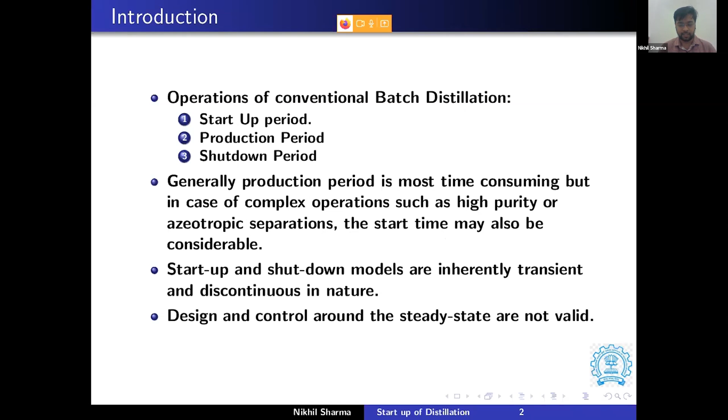The startup and shutdown models are inherently transient and discontinuous in nature. Therefore, the design and control around the steady state are not valid for these startup and shutdown operations. So moving on to the scope of startup operations, the dynamic simulation of startup and shutdown operations is beneficial in modeling, design, control, and operability of distillation columns.

Training of operators can be done. For designers, the information may help in avoiding operability and control problems. Modeling of startup operations is also of interest for optimizing a distillation system, wherein for optimization to initialize, certain assumptions are involved, that is pseudo-warm, steady state, initial total reflux, etc. That can be avoided in the presence of a proper startup model.

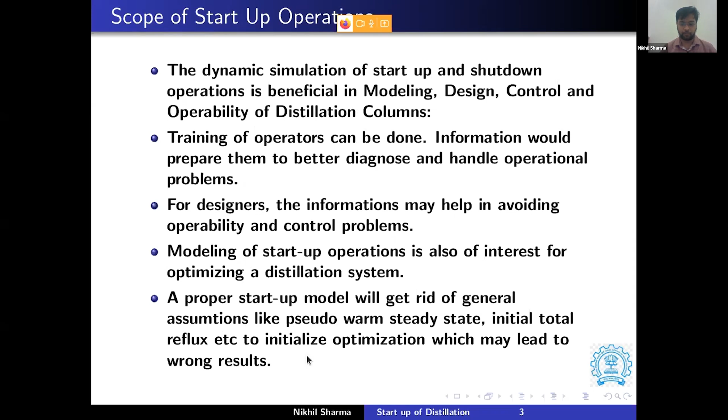So objective: despite being critical operations, there is limited literature available for startup and shutdown operations. This is mainly due to inherent complexity involved in modeling the dynamic behavior such as phase change, variable structure, and model switching during the simulation. Some publications are available which take into account many assumptions like ignoring transition or adding trivial equations, but most of the time these are not valid assumptions.

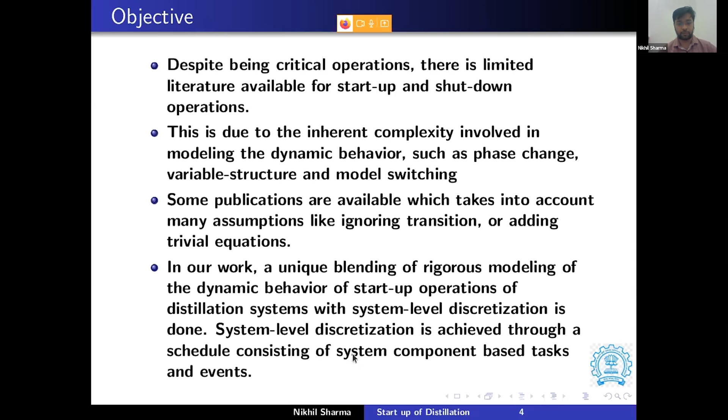So in our work, a unique blending of rigorous modeling of the dynamic behavior of startup operations of distillation systems with system level discretization is done. System level discretization is achieved through a schedule consisting of system component based tasks and events.

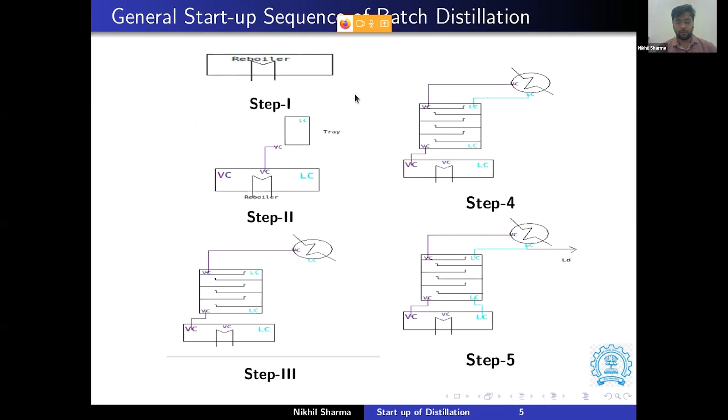So we can see, to model this behavior, we have the phenomena of changing the equations of the model in between the simulation. That is, VLE equations have to be incorporated, and addition or removal of components is required. So this makes the modeling and simulation complex for startup processes. So in order to do this, we have developed a scheduling framework in OpenModelica. OpenModelica is a general purpose modeling and simulation environment, but Modelica does not provide support for scheduling.

So Modelica modeling of discrete behavior is achieved through a schedule consisting of system component based tasks and events. The schedule is a connected graph and is compliant with control flow workflow patterns. It simulates only the active components of the system by auto discretizing the model. And it also enables the variable structure modeling that we have seen, where we have to incorporate the VLE equations after some time.

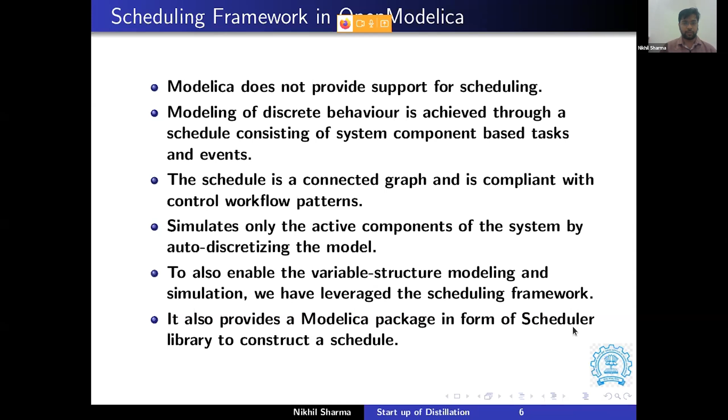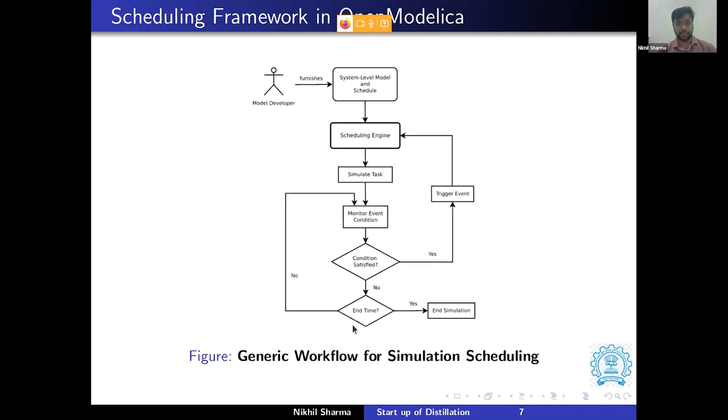The scheduling engine, which is written in Python, interacts with the OpenModelica compiler through a ZeroMQ interface, and it simulates the task and monitors the events. If the condition is satisfied, then it triggers the event. Otherwise, it looks for the end of the time or the end of the simulation, and the loop continues.

So, in order to test this, there is an example. We have considered a methanol-acetone mixture for a batch distillation system, and the startup is studied. The mixture of methanol and acetone is fed to the reboiler. The column is operated at total reflux. The column specifications: there are 15 stages. Tray and condenser holdups are 2 gram moles each.

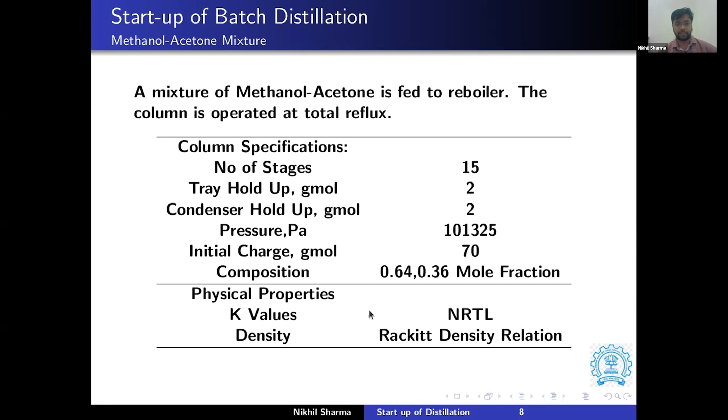It is operated at atmospheric pressure, and the charge is 70 gram moles with composition 0.64 and 0.36 mole fractions for methanol and acetone respectively. The physical properties are evaluated using an NRTL model and density through Rackett density relations.

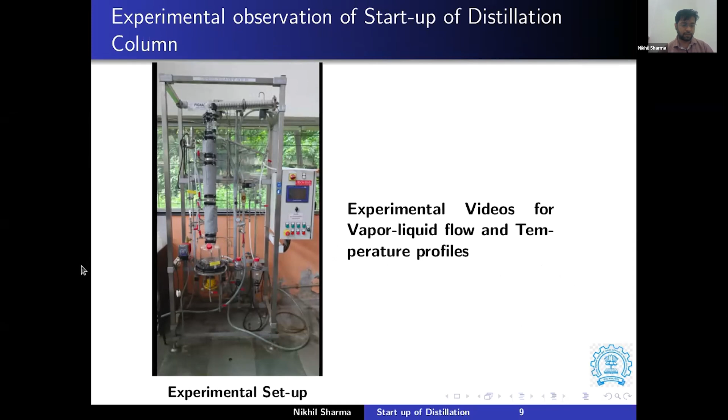So this is the experimental setup we have. This is the reboiler, and the column has 3 sections of 6, 6 and 3 trays, so that it comprises 15 trays and a condenser. We have intermediate temperature sensors to measure the temperature. So here I would like to show the video of how the startup is done.

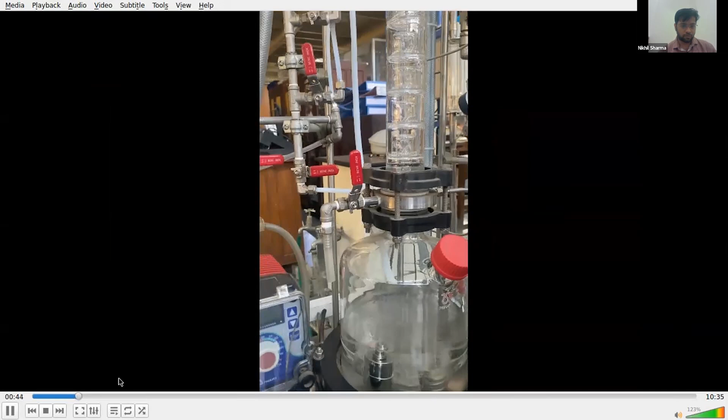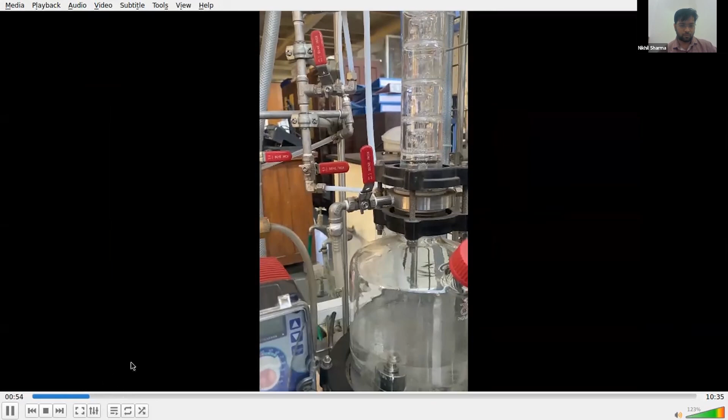So you can see that feed is charged in the reboiler and it is getting heated. Initially the trays are empty. One by one, the vapor is reaching the trays and getting accumulated. You can see the top trays are empty now, and after some time they start getting filled.

Now the top trays are also filled one by one, and we can say that the total reflux starts. So this is the model we have followed for our simulation. I'll stop this video here and go back to the presentation.

So I would like to show how we perform the simulation here, basically to show you the interface of the scheduler. This is the OpenModelica interface. This is the scheduler. We have task and event based components, and various dependencies for events to take place. And this is the object oriented model for the batch distillation system. We have thermodynamic functions, enthalpies, and the object oriented models for the condenser, reboiler, and trays.

So this is what we want to achieve, where my cursor is. The feed is charged to the reboiler at first. Only these components are solved. When the reboiler is filled, up to 70 gram moles, heat energy is provided at step 2.

When the bubble point is reached, a tray is added just above the reboiler, along with the VLE equations. So the model of the reboiler is switched, and similarly, when the bubble point is reached, it is replaced with the VLE tray, and the tray just above is added with just a normal energy balance equation, that is Q = mCpΔT. In this way the entire model is made.

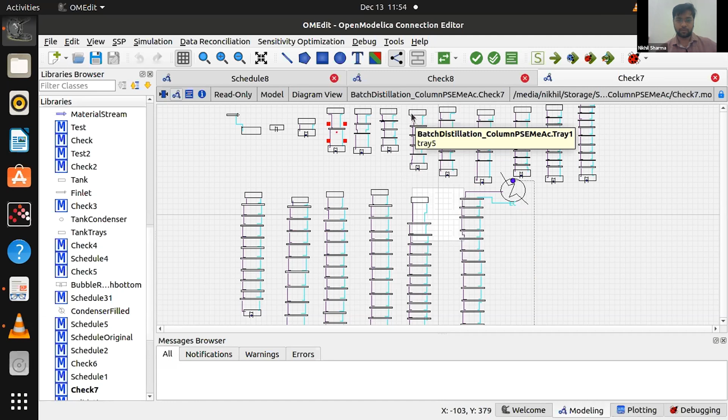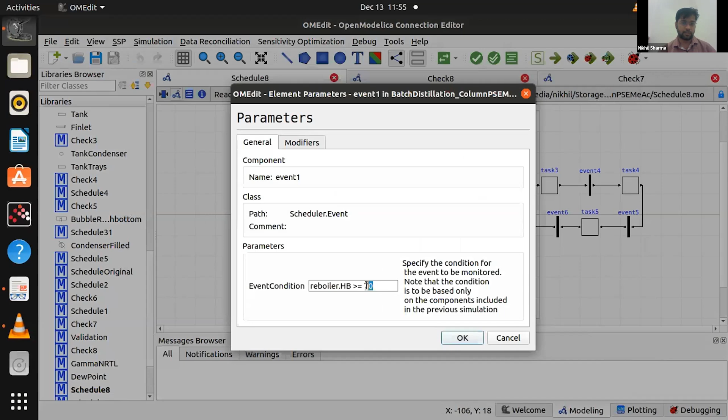And for scheduling, in the first step we have to charge the feed and the reboiler only. With the event, as soon as 70 gram moles of feed is charged to the reboiler, this step should be finished, and the reboiler should be replaced with the bubble reboiler, which contains the VLE equations. And when the bubble point is reached in the reboiler, there is an addition of the tray, as you can see here. So this is where this scheduling framework works.

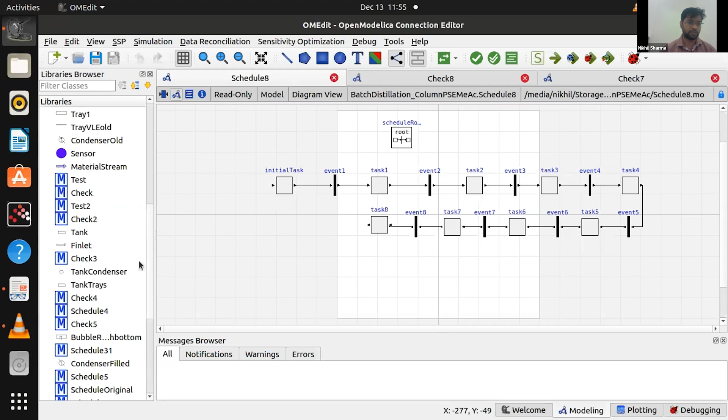Moving on to the results, I'd like to first show the simulation of the first step. It includes only the feed and the reboiler. As soon as 70 gram moles of feed is charged in the reboiler, this step is completed. In the next step, only heat energy is provided, so the holdup remains constant.

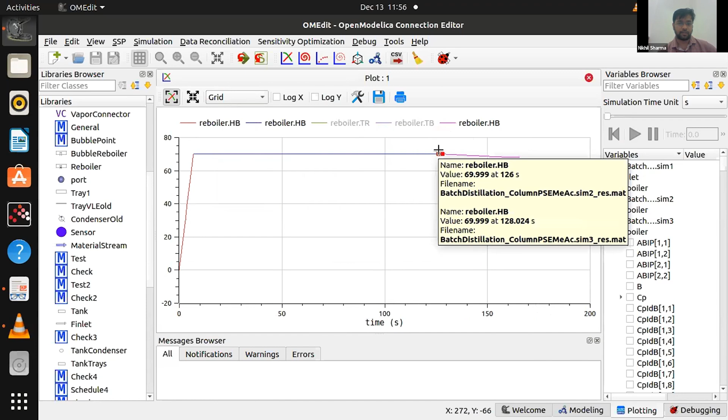So you can see initially it is filled with 70 gram moles, and the heat energy is provided. So here the holdup remains constant, and as soon as the bubble point is reached, the vapor starts going out of the reboiler, and the holdup decreases. So in this way, the entire simulation can be performed. We can see the temperature profiles for every component.

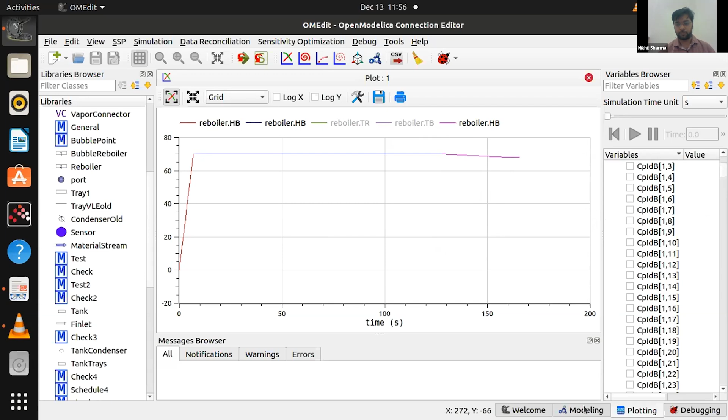So moving on to the slides again. So our simulation results are in comparison. So next we have taken the startup of a continuous distillation column. So an equimolar mixture of benzene and toluene is fed to the reboiler. The column is operated again at total reflux. Then a continuous feed stream is introduced, and products are withdrawn.

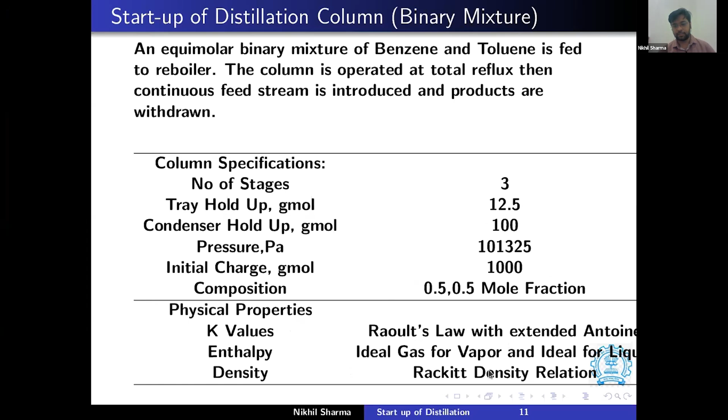So here we have taken three stages, and tray holdup is 12.5 gram moles, and condenser 100 gram moles. It is operated at atmospheric pressure with a charge of 1000 gram moles with an equimolar feed. So here we have taken the ideal system, that is, K values are calculated using Raoult's law, enthalpy and density with the ideal gas or vapor relations, and Rackett density relations respectively.

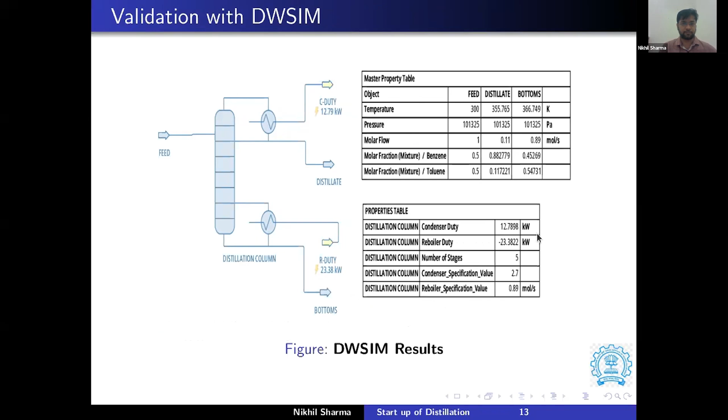And for the validation purpose, we have used DWSIM, which is an open source alternative to Aspen Plus. So our simulation results, steady state results, are exactly matching here with DWSIM. So it validates our model as well as the simulation results for the continuous operations. So having proposed this model and validated this, we can use it to see which startup policy is better.

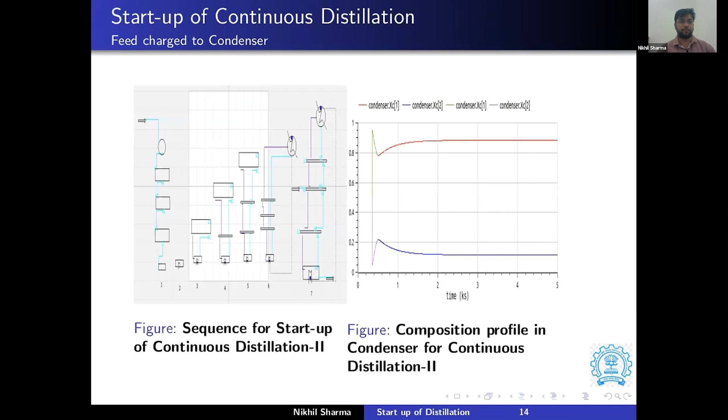For example, here we have charged feed to the condenser. Then another application can be the feed is charged to the reboiler with heavy components, and the light components are fed in the condenser, and then the column is filled with the feed. So this is another type of startup policy. So with the brute force method we can see which startup policy is best.

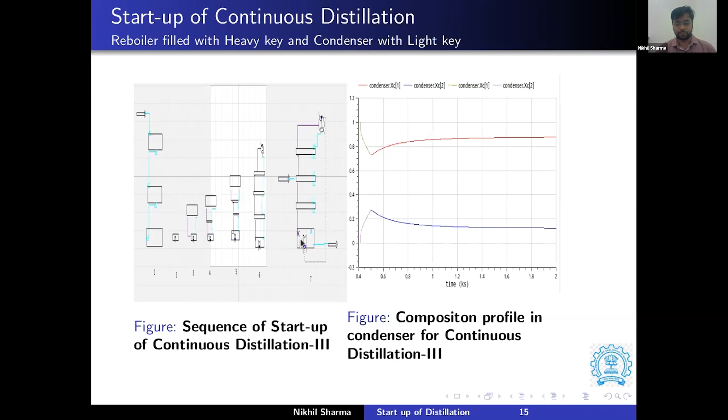So moving on to the conclusion, despite being a crucial operation for both batch and continuous operation, there is limited literature available for startup operations. Startup models will be helpful in the accurate optimization of the process. Startup models are also vital for operator training and design. A generic framework for the startup of a process plant is developed by blending a rigorous dynamic model with system level discretization.

And future work includes optimizing these operations using variable structure optimization, implementing a control strategy, and extending the scheduling framework for the startup and shutdown of the process plants.

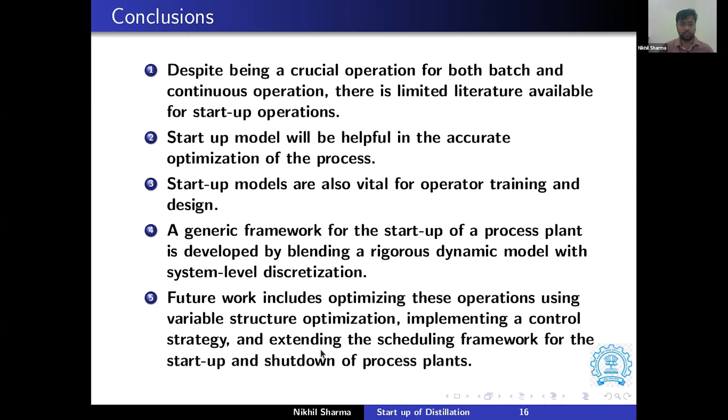Hello. In the continuous distillation column, the experimental study you use 3 stages, but the DWSIM validation uses 5 stages. The number of stages for that continuous distillation column used 3 stages, but in the validation step with DWSIM you consider 5 stages. Okay. So I'll repeat the question. The question is, in the continuous case for the validation, I have a different number of trays. Is that the question? Yes.

Okay. So for the batch distillation, I had taken 15 trays, and 15 trays were available with the setup that I have. So it was validated with the experimental results. Since the experimental results are validated, I moved on to the continuous distillation. And for the continuous, I have simulated the same unit with DWSIM. So DWSIM is a steady state solver. So it gives us the steady state results.

And so I have operated the startup with the scheduler that we have developed in the lab, and in order to check the results of the continuous distillation, I have just checked the steady state results, because we cannot check the startup operation through other simulators. So in order to check the steady state results, a different case with a different number of trays has been taken. So it is solved with DWSIM in order to validate. Got it, got it. Have I answered your question?